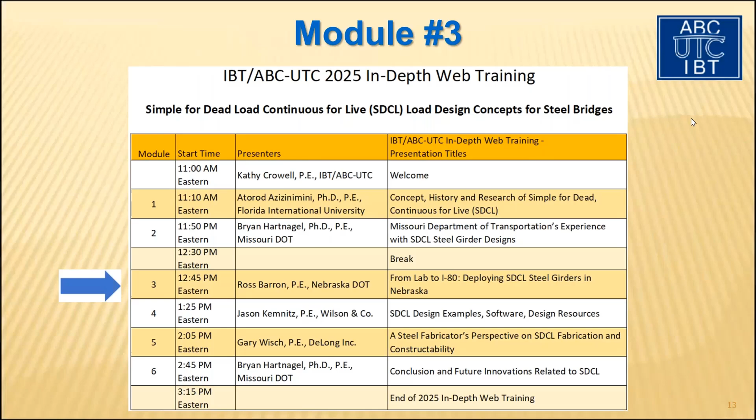Ross Barron is the state bridge engineer for Nebraska DOT, and he'll be talking to us today about from the lab to I-80, deploying simple for dead load, continuous for live load steel girders in Nebraska.

Well, as Kathy mentioned, I'm Ross Barron. I'm the state bridge engineer for the Nebraska Department of Transportation. I've been in this role for about 4 years now. Before that, I was a design consultant here in the region.

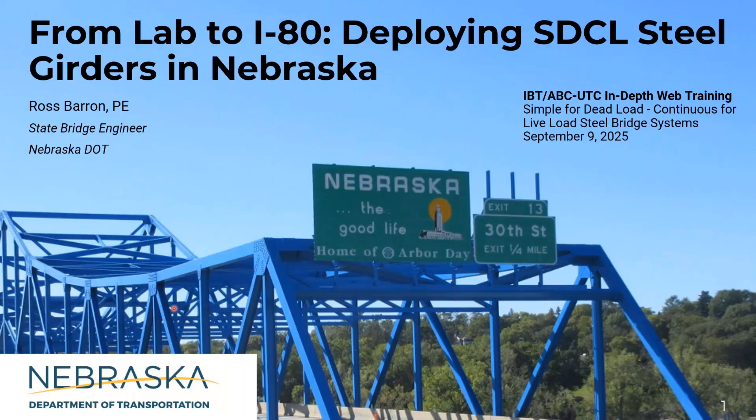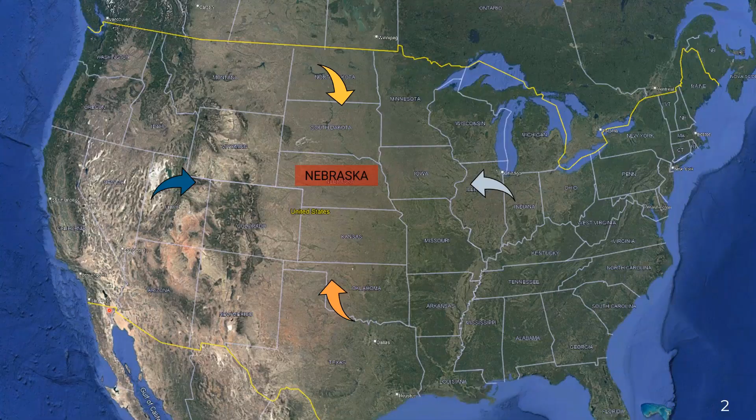Sounds like there's people who may not know, just like Missouri, Nebraska is right in the middle of the country. So I wanted to share where we're at a little bit. Yes, you may fly over it, but I'm going to do a little pitch for the State of Nebraska Tourism Board. Come check it out. There are quite a few open areas to explore, I guess is the best way of saying it.

This is the most recent census data where you can see you've got Lincoln, Nebraska here on the eastern side, and then Omaha is our two major metropolitan areas. But the rest of the state, you can see the western side, it's a whole lot of open area. So Nebraska's got some unique challenges with our state bridges and then certainly with our local bridges.

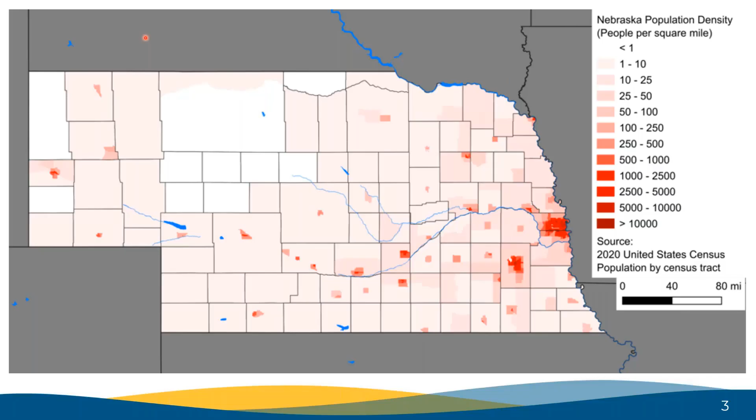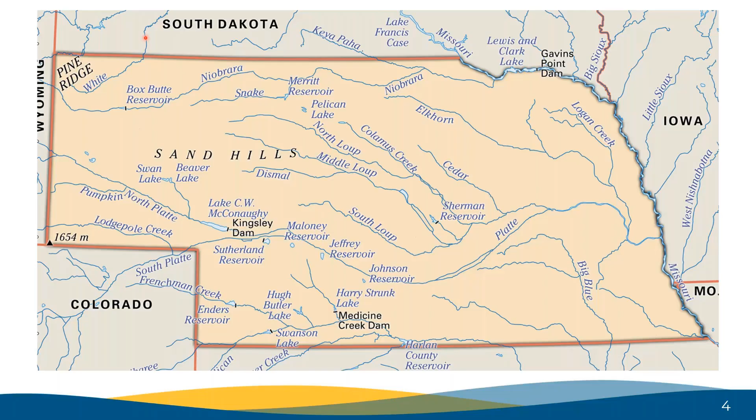So this is a little bit of what bridges are doing out here in Nebraska. You can see we've got quite a bit of waterways that extend all the way to the Missouri, and this is kind of our main challenge as a bridge engineer. We're not going to have a lot of major interchanges, and our urban areas are going to be mostly in that Lincoln and Omaha area. But you can see we've got quite a bit of major channels that we're crossing throughout the state.

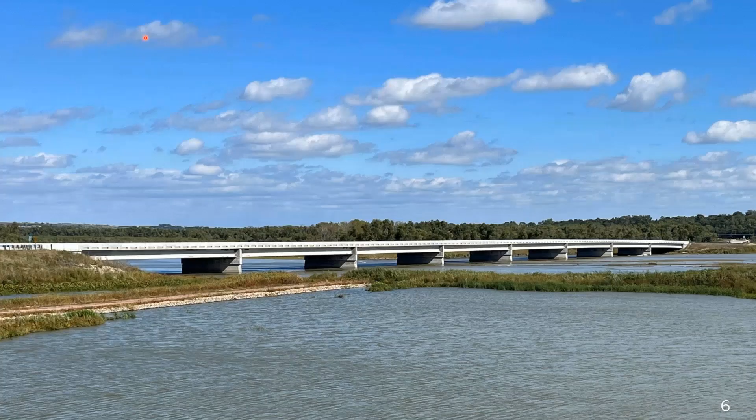But this is what our bridges are going to look like. We have quite a bit of these. We have a lot of braided channels out in this area, right? So wide open, shallow channels. Our highways will extend over them multiple times in a 2-mile period, but you can see this is a pretty conventional bridge for our state highway system.

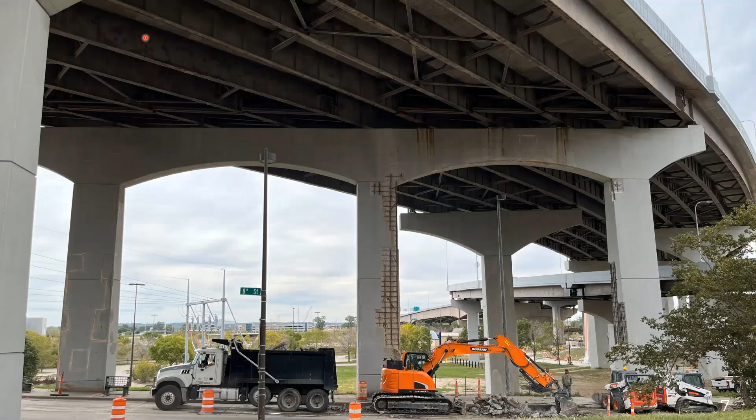But also we do have these urban bridges, right? So we have the challenges that we would face with any aging urban infrastructure. And you can see this is a steel bridge. I'll tell you, we do a lot of concrete bridges that look a lot more like this. And so this is a great time to have a discussion about concrete being economical and the go-to choice within the Midwest, but bringing light to this simple for dead, continuous for live system to really evaluate it and see what opportunities are out there for us.

So the Nebraska Department of Transportation, we directly own, maintain, program, and deal with about 3,541 state-owned bridges. And then obviously with the local bridges, we have 11,729, and the state oversees the inspection program with those, but they are locally owned. And so the local owners will program that work, maintain them, and quote unquote own them.

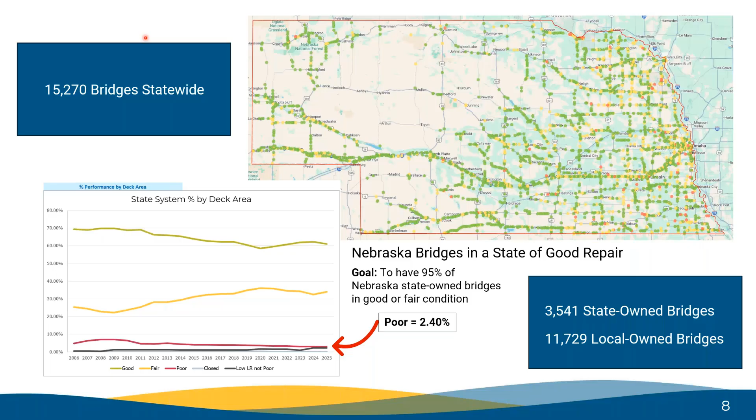So I'm going to take you back. Dr. Azizinamini mentioned the Nebraska Department of Roads at the time, and now it's transportation. We initiated research with the University of Nebraska Lincoln back around the 2001 timeframe. And really the impetus for this was about 1990, and even before then, the industry was really moving heavily into concrete girders.

And so prior to the Simple for Dead Continuous for Live research, NDOT, or NDOR at the time, and the University of Nebraska did quite a bit of research on the NU Girder series. For those of you who haven't heard about the NU Girder, it was a new model following the advent of the AASHTO bulb T girders that produced a wider flange and a more economical shape that allowed us to span differently and be a little more efficient than those AASHTO type pre-stressed concrete girders.

And so we were using these quite frequently. We were still experimenting with post-tensioning. We were evaluating continuity over negative moment regions. And what had become apparent was that the simplicity of the pre-stressed concrete girder was outweighing some of the complications with erection of steel continuous girder systems. And at this time, continuity obviously was very important. It allows you to use a shallower section, and there are big advantages to that.

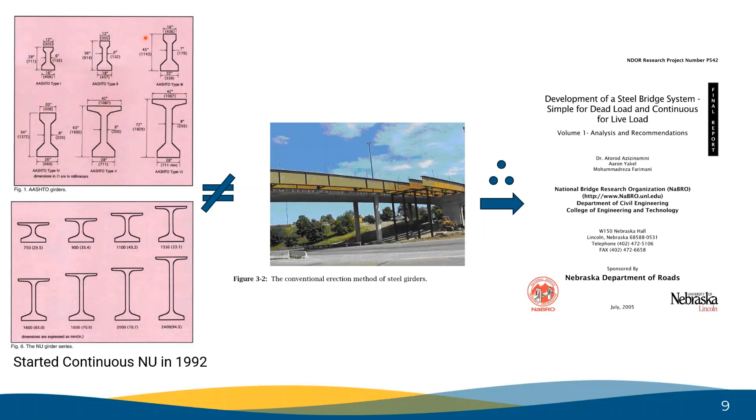And therefore, an expert in research and bridge engineering at the time, Dr. Azizinamini, was at the University of Nebraska, Lincoln. He and his team worked with NDOT to basically evaluate whether we could mimic the pre-stressed concrete girder system with the steel girder. And that's what we're hearing about today. So that's a little bit about the history of how we got here.

And so you can see, and we heard it earlier today, that NDOR at the time, we were there for the tests. Funny enough, I was actually an undergrad at the time, and I remember going into the lab at University of Nebraska and seeing this. So it's kind of a neat opportunity for me today to present about how NDOT is dealing with these bridges 20 plus years later.

So this system, this research, you can see the bridge above. This is what it looked like before. We needed replacement. We had a typical 4-span steel girder system, continuous, and what we were accomplishing was to eliminate those 2 exterior piers and go continuous with a section that is about the same structure depth as it was before. And so that's a huge improvement from going back with another 4-span bridge.

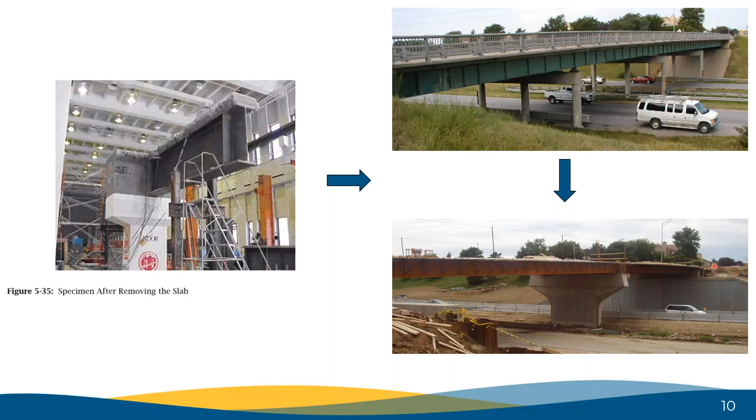And you can notice very slightly, there's a minimal grade raise. That's very important on a bridge like this, that it allowed us to not have to grade out a lot of the area and affect, you can see the apartment complex in the background, those area buildings. So NDOT was there at the beginning, and we implemented 3 of these systems. You've heard about them a little bit this morning. I wanted to show you where they're at.

So the first was an urban bridge in the Omaha area, and it crosses Interstate 680 in Omaha. It's a north-south route, and we'll talk about that. And then the other 2 were along I-80. For those who don't know, I-80 is our main interstate in Nebraska. It stretches all the way from the east side of the state, travels across, follows the Platte River, and goes all the way across. So that is a key interstate connection for Nebraska Department of Transportation.

So the fact we built 3 of these over an interstate can tell you that really the focus of that research was to not necessarily take the MoDOT approach of using these on smaller spans, but the intent here was to showcase that this system can be placed over an interstate where disruption to traffic is very impactful. And so we really wanted to provide that proof of concept, and you can see the results.

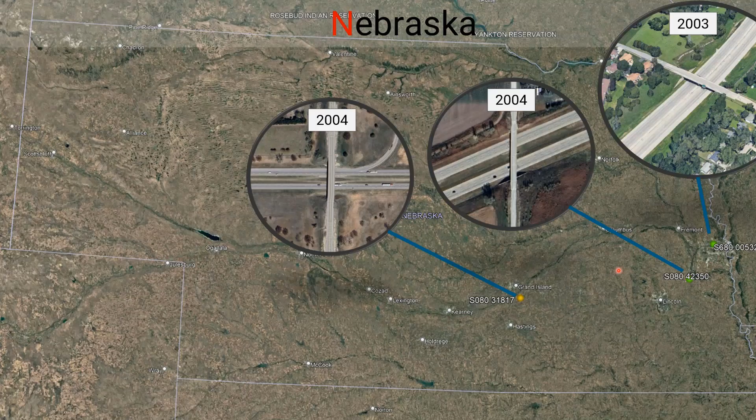So I want to talk about the bridge over I-680 first. This is Sprague Street in Omaha, Nebraska. This was built in 2003. Right away you can see this is an 8-lane interstate with sizable shoulders, and we have a 2-span bridge. You can see we've got an MSE wall or a precast wall system on either side to bring in those abutments. And sliding to the next page, you'll see the configuration a little bit.

So we've fixed the superstructure at the pier, the bearing condition, and then we've leveraged integral abutments and expansion bearings at each end. You can see it's a 2-lane bridge with sidewalks, so it's a pretty typical urban bridge. It's connecting 2 neighborhoods, but again, the key constraint, as any state bridge engineer will tell you, is please don't close that interstate. And so when we talk about, you know, if there's a need for splice locations or erection timing, you get one overnight closure.

And because of that, a pre-stressed concrete girder or a precast system, it just comes out as having a lot of advantages. So this bridge, like I mentioned, was built back in 2003. So that makes this bridge, I think I put 21, but for those who are better at math than I am, apparently, I put 21 years down. So it's a 2-span. Each span is nearly 100 feet, so 194 foot total.

So today I wanted to share just high level the NBI condition ratings, right? So this is how the Fed highway system works, where we will rate our deck, superstructure, and substructure anywhere between 1 to 9, 9 indicating the best condition, and 1 being that bridge is closed and it's about to fall down. So we don't let our bridges ever get to 1.

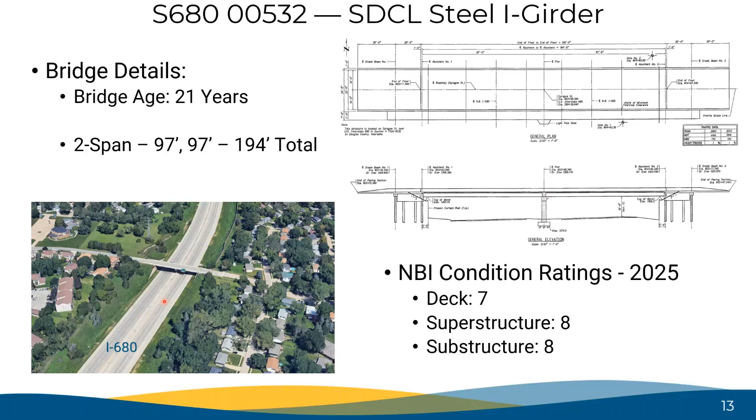So now to the details. We've seen some of them a little bit, and I just wanted to share a little bit of my perspective, that you can see what's happening during construction here, where on the left, we've got a picture of both girder systems in place. They're setting the formwork. We do use steel stay-in-place forms here, but it's a very, very easy, simple approach with traffic going underneath. So you can see it's minimal disruption. Now at this time, it looks like it's head-to-head traffic and there's nothing going on here. But you can see this really showcases how shallow that system is.

And then we've seen this detail before. It's worth noting that we still have these wires hanging down, that these sensors were invaluable for the research. But it's really cool to see this detail, and I appreciate the simplicity of it overall and the ease of construction. I think one thing we heard from this contractor and every other contractor is, oh, we thought this was a research project and it was going to be really challenging, when in reality, this was very, very easy and straightforward, very economical, and really, really simple to fabricate the end of that girder.

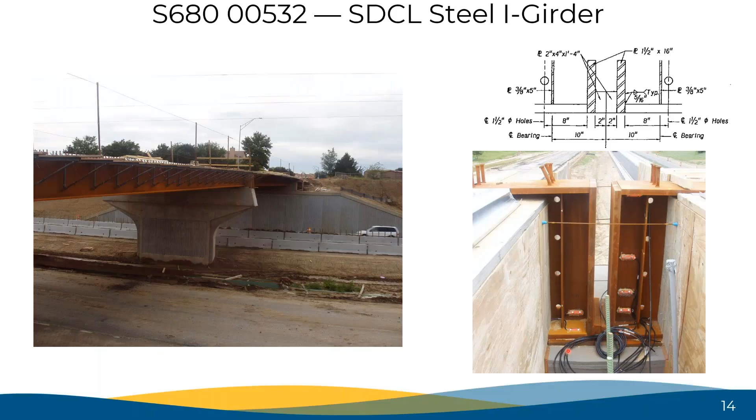So the one thing that concerns us in Nebraska, maybe more than anything, is we know our substructure and our superstructure, our girders, are going to be okay for a long haul. But our deck, we are a state that salts our decks, right? We have very, very harsh winters where we have freeze-thaw cycles that happen within the same day, where we'll get a lot of snow and it'll melt the next day. So we have rapid temperature swings. What that means is we'll go out and we will pound this concrete with salt throughout a 6-month period potentially, to ensure that they're safe to drivers.

So the deck condition after 20 plus years, there's no overlay on this bridge. This is the original cast in place concrete deck. We see no signs at the pier of any major cracking. There is narrow random cracking, but we were successfully able to seal those. And so you can see the deck condition, we've got a little bit of rusting, but that's indication of nothing more than the drainage going that way. And it's likely fertilizer more than anything. You can see some white spots, but we think that's paint. So again, the deck condition on this has performed very, very well over this 20 plus year period, and we're very happy with that. That would be one of the concerns, that we would cause adverse cracking to the deck.

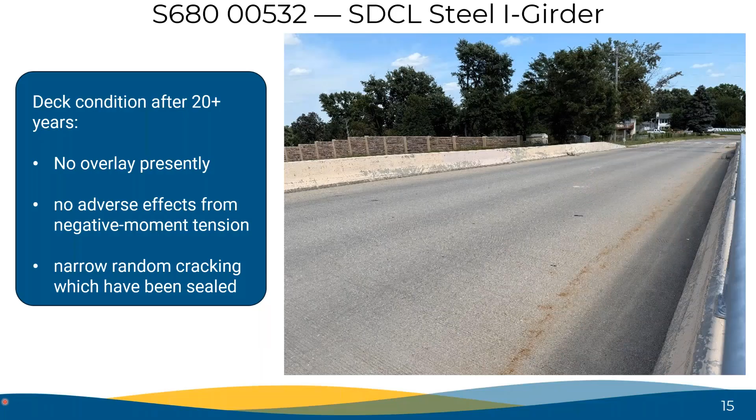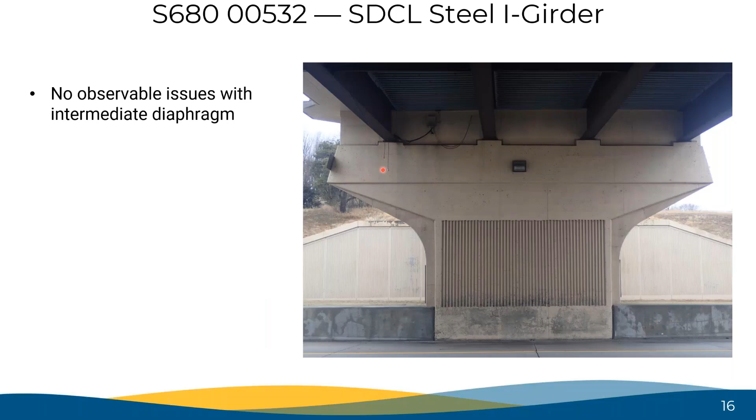So the intermediate diaphragms, another area where we were thinking, oh, what's going to happen here? Research showed it would be fine, and sure enough, there are no issues whatsoever with this diaphragm. So you can see there's minimal cross frames near the support. These are our sensors dangling down. I don't think we've gone out and tested them anytime recently. So you can see it's very clean, and it's working very, very well.

So the one thing we have seen is at the abutments, we've seen some salt collection happening at the ends. If you look very, very closely, some scaling along the steel at the ends, mainly along the fascia girders. And then you've got some rusting of your stay-in-place form deck pan. Really, all that is indication of is, again, you can see the amount of traffic that can travel down here. So you're going to get a lot of salt spray coming up and hitting these girders, particularly the fascia girders. And so we're just seeing an indication of that.

And this is weathering steel, so you are going to get kind of some advanced corrosion from that salt exposure. For those with a keen eye, you can see there's a concrete pad here. Basically, that was just an erection pad to help support the girders during construction, and then to fill in that gap with the MSE face.

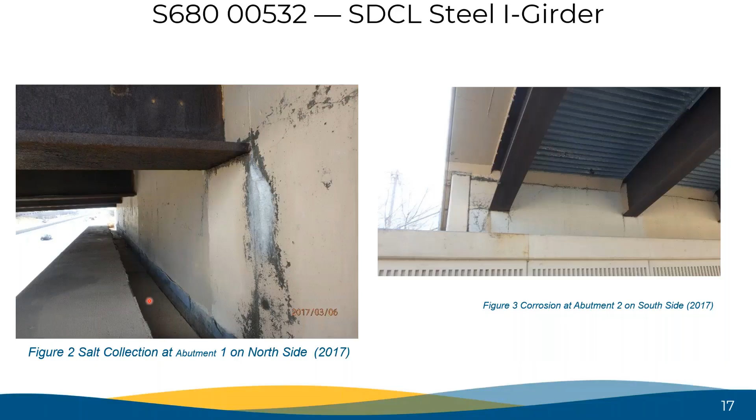We think because this is an integral abutment, you're going to certainly get some thermal shifting back and forth. And so we think over time that's just settled down. We've had a watch on that for a while, and there's not really any concerns, but we're keeping an eye on that.

So kind of the recommendations coming out of this, a review 20 years later on what do we think about this system. This bridge indicates that there should be no concern with continuing to use this method at this span length with this configuration of the integral abutments. The structural depth limits were met, that a pre-stressed concrete girder would be about the same height. The erection was very, very simple.

Ongoing maintenance recommendations are very, very minimal. We do intend to zone coat those fascia girders at the end to protect from that salt spray, because this drip bead detail wasn't working perfectly, we think we had water running along that flange. And then, as with any bridge about this age, you want to check for settlement of the approach slabs, the joints. Certainly we need to continue to maintain, but these are all things that we would normally be doing.

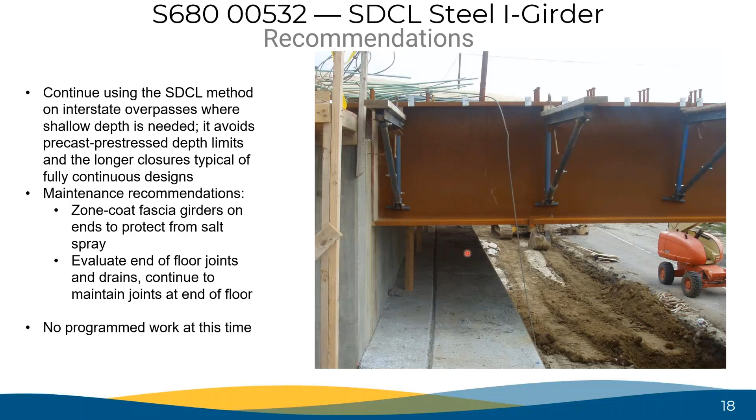And so it's worth noting, we have no programmed work at this time. Typically we'd be looking at a redeck around this time or an overlay, but we haven't programmed anything at this time. So overall, this bridge is not a concern. It's working wonderfully for us.

So now I want to move more towards I-80. You can see the span length on this bridge. This is out near Grand Island, Nebraska, at an interchange out there. And this is a tub girder that we saw earlier from Dr. Azizinamini. And real quick, it's worth noting, this alien looking thing, that's just sensor wires. So don't be concerned about that.

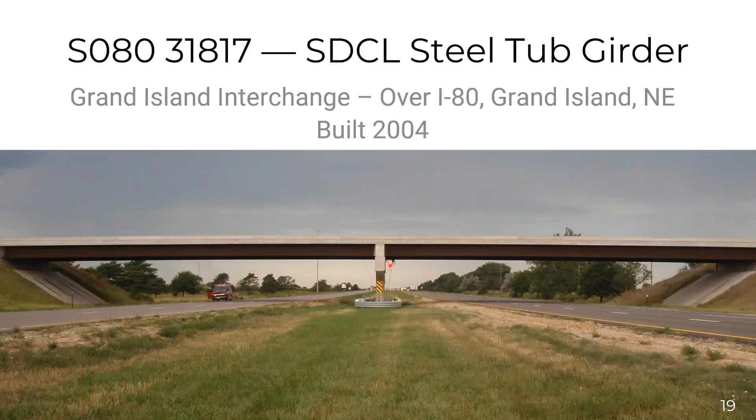Okay, so this bridge, again, probably fuzzy math, it's not 21. I think by the time it opened, it's probably about 21 years old. So it's two span, 139 feet, 139 feet balanced. You can see it's a similar configuration where we've fixed the pier support, and then we have expansion and similar integral abutments at each end.

So Interstate 80 in this area, it's a 4-lane divided interstate. You can see here there is an on-ramp coming on, so it's got that additional lane. Instead of using MSE walls on this bridge, we use just typical concrete slope protection. And it's worth noting we do have pipe piling on this one instead of an H-pile with those integral abutments.

So you can see it's a fairly shallow structure depth. That's a nice, elegant shape. And I'll tell you, that's something that any bridge engineer is going to want to see, these long, shallow shapes that follow that crest over the interstate. So it's a really elegant looking bridge.

So construction in 2003, if you were on earlier, you would have seen some of these pictures. The construction is very, very simple of these. This is like setting any beam, except one thing to note, these tub systems are very, very stable, meaning you've got cross frames on the interior. They're stable once you place them.

You got a 2-crane pick here, but you can see that the truck just drives right down that road. They pick it up, lift it, and put it into place. They've set some down here, and it goes very, very quickly from what I've heard. So again, the contractors really, really like this system.

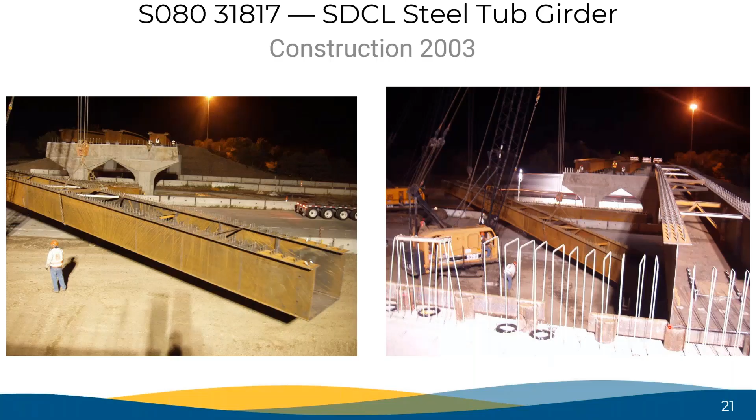You saw it with Brian's presentation earlier, and you'll see it here where we've used a simple integral detail where you just take the piling up to the bearing seat and you weld a channel across and you just plop those things right down on the abutment. So it couldn't be any easier for a contractor to build.

You can see again, what this speaks to is the stability of the system. One thing I'll note, there are no external cross frames between these beams. And so when you think of erection time and the time that you're closing to traffic, I bet in this picture, even though we don't see any cars, that this was open to traffic while this picture was taken.

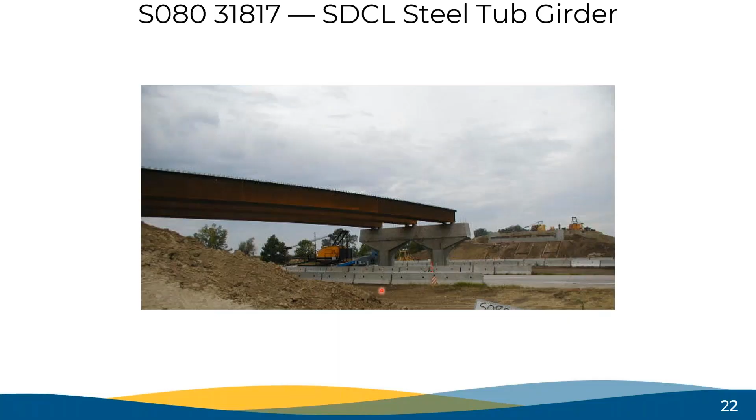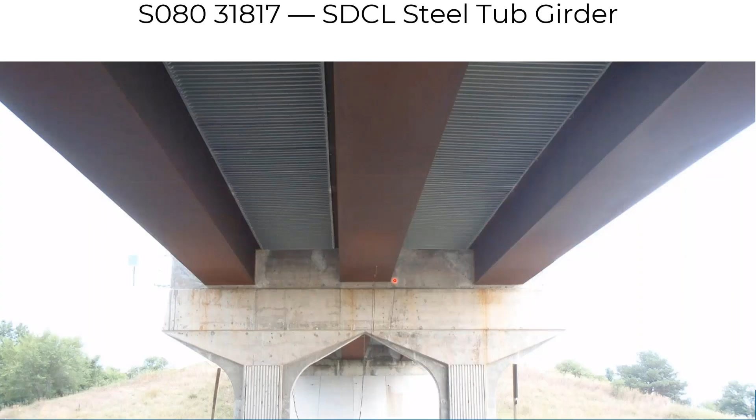But overall, it's looking great. So, a quick detail towards the end so you can take a look at this. Just like the I-girder, you're going to have this fabricated bar on the compression flange. And then here we had turn down plates at the tension face as well at the pier, just at the pier. And then a really, really nice detail to simplify construction that was easy to install is this bulkhead, so that you can just pour concrete right up to it. Since you're pouring your diaphragm and threading bars through these holes, this bulkhead made it very, very easy.

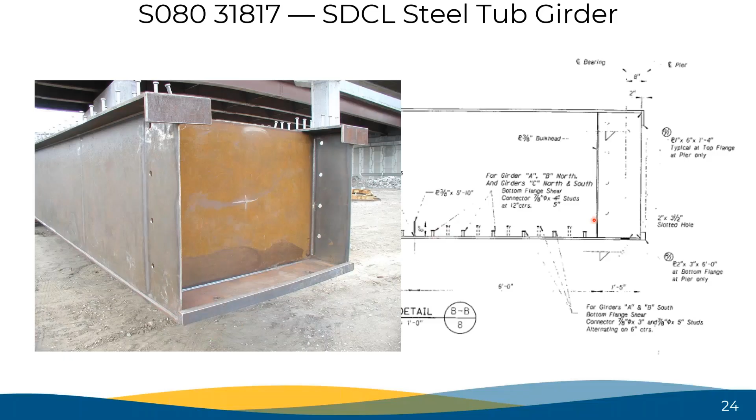And then if you'll notice, you've got shear studs on the interior here, and that's for that compression flange bracing where we're going to pour some concrete kind of through here to brace that bottom flange. So it forms up pretty easy. I thought a really nice detail here as well, and the turn down was certainly, it looks like a normal turn down. We're threading the bars through, but it was these bearing blocks that, from a bearing perspective, this is very easy. As I mentioned earlier, this is a fixed pier, so everything gets encased. So really this is just temporary for construction. But again, you can see how easy this is to form up, and how easy it is from a detailing perspective with the reinforcing.

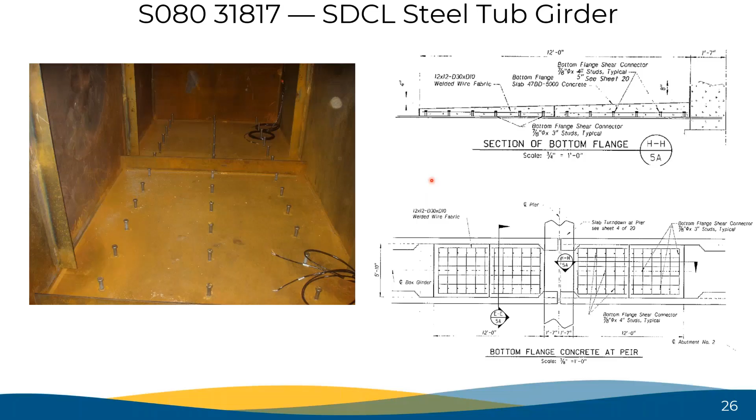It is worth noting we did use 5 KSI concrete in that diaphragm due to some of those additional forces that were in there. So here's a picture from the interior of the tub, and this is showing those studs and showing that compression concrete that we would be placing after this. A really nice detail. It's been performing well. Unfortunately, I don't have pictures of what it looks like today, but inspectors have noted that it's in great condition and they're seeing no distress at all. So this detail has been working very, very well for us.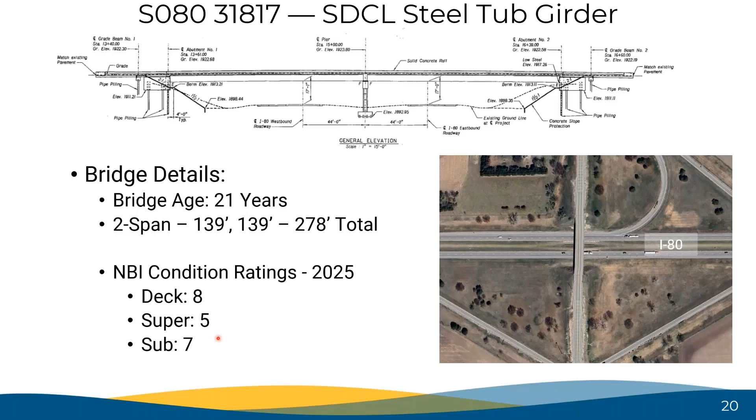One issue we have seen is that the deck is an 8, the super is a 5 in the most recent inspection, and then the sub's doing just fine. So that super rated a 5 means it's in fair condition, that there's some issues with it that we want to keep an eye on. And so if I go back to where I was, you can see we're seeing some scaling issues at the end of this 100 KSI steel tub. And we think it's an indication of the similar salt spray we saw on that I-80 overpass, where salt is gathering around that bottom flange and it's just scaling it.

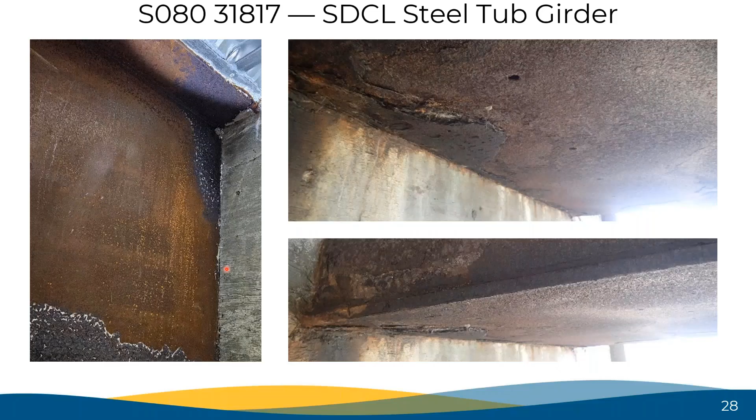So this is actually the exterior, but you can see you've got salt spray here. We've done some additional studies. We've climbed up in there and we've been monitoring some deterioration on the inside of the tubs. And we think there might be an airflow issue where some water is getting in through the back wall of this bridge. So we're tracking that, and we think we've got a good fix. And so one of the things we do want to do with this superstructure, and that we would recommend looking at in the future, is improving airflow within those tubs. If we're using the same dimensions for the back wall detail, maybe we'd want to widen that integral abutment a little bit just to provide a little more concrete protection to it.

And then we do want to enhance some of the abutment drainage details to make sure water isn't getting into those back walls. Because we've embedded this steel in the concrete, we want to make sure that water is pushed away from it. And then if we were to build this bridge today, we likely would have end zone coated those steel tubs just to prevent any of that deterioration that you're kind of seeing here. And then it also helps with just the rust staining effect. And so it just helps kind of pull that water and wick it away.

So ongoing maintenance on this bridge, it's fairly minimal. We are monitoring some of the issues with the abutment, and we do intend to come in and redo that drainage. We're looking at whether we want to fix any of this concrete by tearing it out or simply just doing some crack injection and continuing to monitor.

But we will be replacing the approach slab, and then we will be kind of doing some treatment to that steel at the end. So still overall, the bridge is performing very, very well. The issues with the steel shouldn't detract from the applicability of the system and the elegance of the configuration.

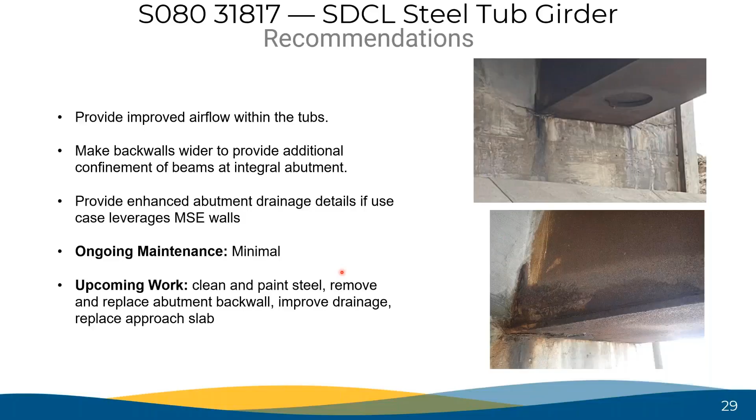Okay, so now to another I-80 bridge. This was an ABC application that we saw earlier. This is between Lincoln and Omaha over I-80. You can see that it's a 4-lane divided interstate today. Similarly, shallow structure depth, very elegant long spans. We still have fixity at the piers and we still have expansion at the abutments.

We did on this use an MSE wall to bring in those spans. So they're about 137 feet each to about a 274 foot long total bridge length. And then this is on a skew. So this is a 24-degree left-hand back skew, and you can see it here. Left-hand back, meaning that the left-hand side is skewed backwards.

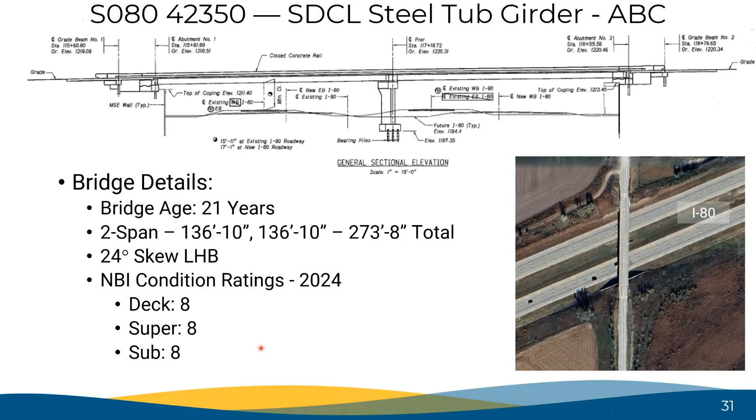And you can see from the condition ratings taken last year, this bridge is in excellent health for a 21-year-old bridge. So we are very, very happy with what we're seeing out of the inspection reports on this ABC application of this SDCL bridge. This is also a tub girder, and this is the one that had a deck cast prior to placing the girders.

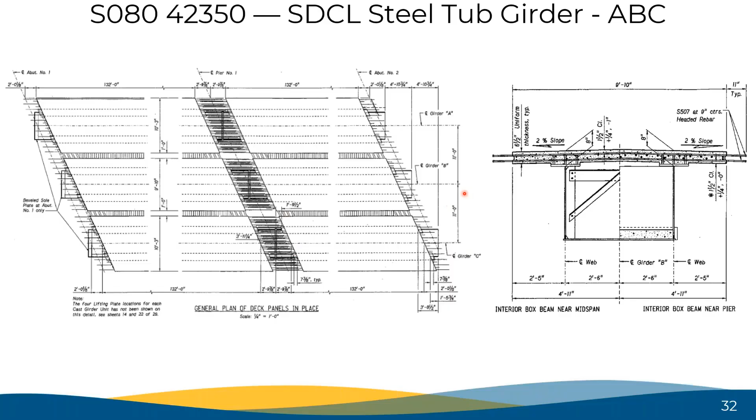So this is the layout of the deck panels. This is the center line of girder, if you can see my mouse here. And this is how all the panels fit up. This isn't an easy thing to do with a skewed bridge, but the intent here is this is I-80 traffic between Lincoln and Omaha, which is a very, very vital connection for the state. And limiting the amount of closure time on I-80 should be desirable for any bridge we construct. So this was a good test case to evaluate how we could accelerate construction even further by pre-placing that deck.

What was nice about that is that we saw it earlier with Dr. Azizinamini's presentation, that they had these girders on site, the steel tubs on site, and they were casting the concrete right there. And so there was plenty of area and it was really easy to do. The contractors had no trouble based on what we heard. Very, very simple, and we got an excellent product out of it. So no issues with placing that concrete there.

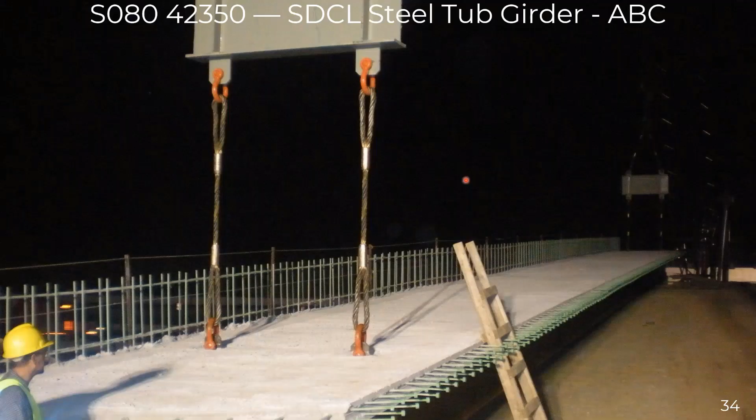The lift was a little harder, right? I mean, you've got all that deck concrete on there now. So it was still a 2-crane pick. A little heavier cranes. The contractor didn't have any problems, particularly given that we had plenty of space to work with out there. So this is kind of the pick lift, the lifting of the girder. You can see the first one's down, the other span's placed.

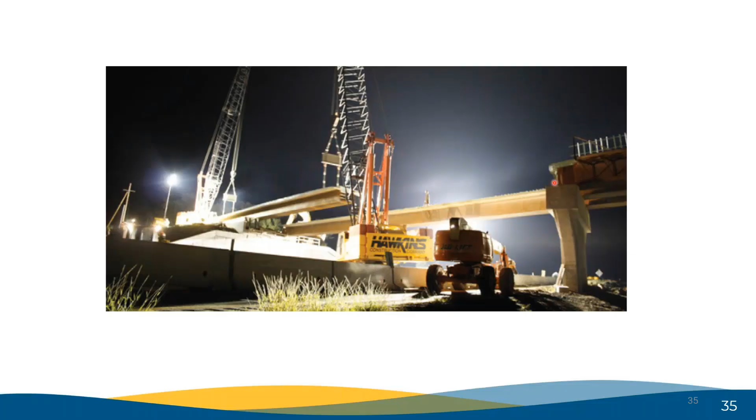Pretty easy nighttime closure. They've come out and they've just put some dirt out. They marched the crane out there. They've got the girders up on the bank already with the deck on them. And they just swing these things out. You can see this one's just going to extend it out, and this one will swing over and just set them into place. Following that, you've basically just got your closure pours and you're good to go.

So one thing to note with this system, again, with the erection being very, very elegant and easy, you can see how clean this is. There's no external cross frames whatsoever. Because we don't have stay-in-place forms, you can see the bottom of the deck. These 2 lines here indicate the closure pour that they had to do between the pre-placed concrete deck on the tubs. But you can see this is a picture taken last year that the deck condition looks excellent for a bridge this age. And so speaking of cross frames, this is very minimal cross frames in here as well.

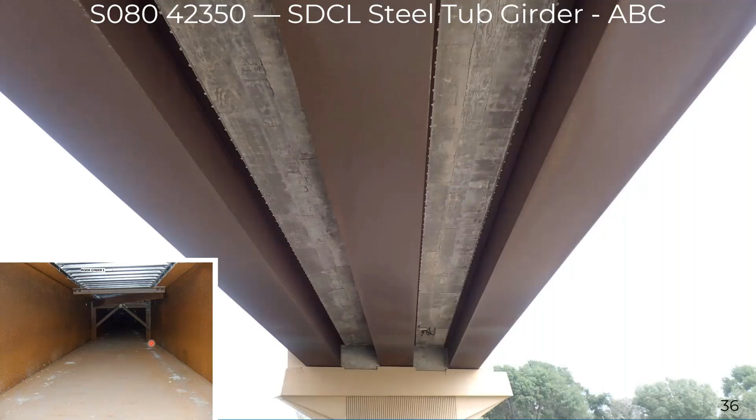And one thing to note, when I was going back and doing some research on this, the vertical webs of the tub really simplified fabrication. It's something that we're studying a little bit more, that too often you'd kind of see a trapezoidal section where you've got an incline to those web plates. But the fabrication process with the vertical plates went very, very well. It was very easy. There was good feedback from the fabricator that we saved a lot of money by having these be square tubs. And you can see here the intermediate diaphragm.

Unlike the other one, there are zero issues with this concrete. Similarly at the abutments, even with the skew, you might expect to see some cracking maybe out here or maybe in here, but this is actually a semi-integral system now that I see it. It's performing very, very well with no cracking or anything like that.

You can see these are the access holes we use to get into the tubs. It's very important when you have tubs that you still have inspection access to get inside and evaluate the interior. You'll notice the ends of these tubs don't have the scaling we saw on the other one.

You can see on these fascia girders a little bit of a profile of salt spray coming up, and you can see some discoloration throughout as you look longitudinally. If you look hard at your screen, you can see a slightly different orange. And so we do expect that scaling will occur at some point along these girders, that we'll need to do some end zone coat painting, but overall no concerns at this time.

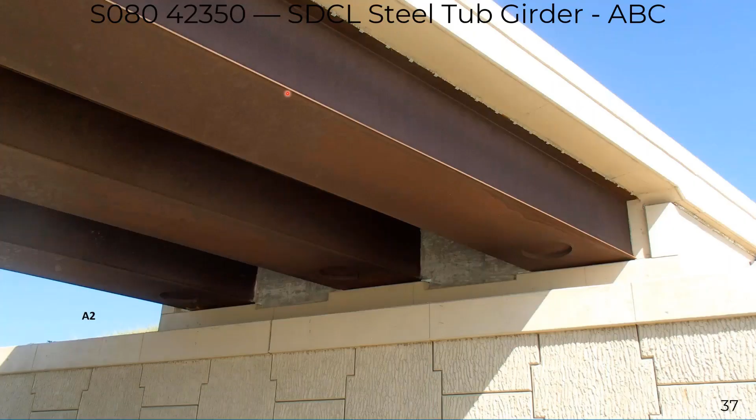So some recommendations coming out of this. The biggest one here is if you can eliminate lateral bracing on a steel girder bridge, try and do that, because from a rapid erection perspective, it provides a great product that allows you to really open that to traffic quickly, so not really interfere with traffic operations. The skewed configuration showed no signs of distress. We would have no concern with going with this same system with a skewed configuration.

And then pre-placing the deck, this deck does have an overlay on it. As we saw earlier, it's a 2-inch silica fume overlay, but it's performing very well. This has provided a very durable deck for a low ADT road. Now this sees a little less salt than you might see on the interstate, but it's a great application, and you can see from this picture that we have limited water leaking through that deck.

And then the limited internal cross-frame bracing is very effective. It allows us to climb in there and inspect, which is very important, and it keeps the weight down. Maintaining the vertical webs I mentioned was a good design decision, and then that 2-inch concrete overlay is doing very well. So for this bridge, we have minimal upcoming work.

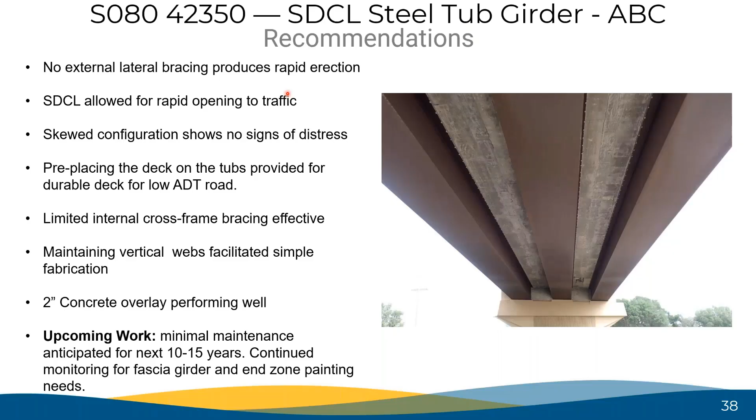We've got minimal maintenance, the typical stuff you might see on a bridge, like cleaning and replacing joints and washing decks and clearing out drains. And then we're just going to continue to monitor those fascia girders, and eventually we'll probably need to end zone coat those. Okay, so NDOT perspective 20+ years later, this SDCL system, it's such a simple design.

I've spent a lot of time as a design engineer, and I think there's a lot of applications for this that make it just as simple as a pre-stressed concrete girder would be. I think it's clear from the contractor's perspective, the construction is very simple. You're just putting the beam down and you're pouring some concrete around it. What we've been seeing from these bridges is that we have a durable design, that we don't need to worry about the details work. They're straightforward, and further, it offers the opportunity for accelerated construction.

There will be times where a steel profile is needed just from a structure depth perspective, and being able to place these girders without splice locations will help us out quite a bit. One thing I did want to share though is, why does NDOT not have more examples? This was a question I asked myself while preparing for this presentation, and I don't have a good answer.

For all of you listening today, whether you're working for a public agency, a DOT, or whether you're a consultant, I want to bring awareness to the fact that this system was researched 20+ years ago, and yet we're not seeing wide adoption of it. I think bringing attention to this will hopefully make us aware that this system is a very viable alternative to a pre-stressed concrete girder, particularly when constrained by things like vertical profile.

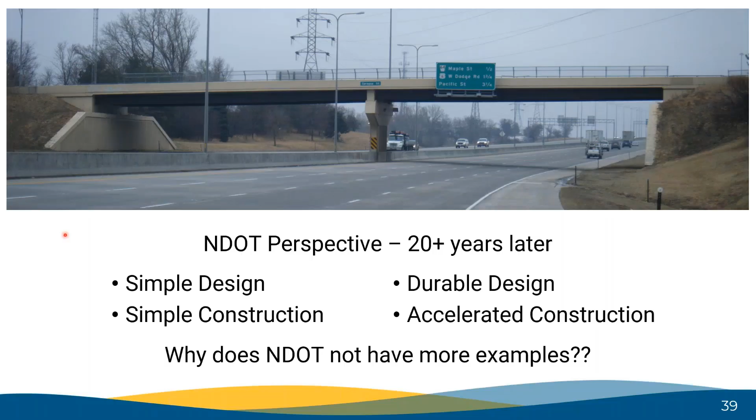So I wish I had more examples, but I think the key lesson here for us is, let's make sure we continue to explore these innovations, that we continue to build, that we leverage the good research that's been done, and that's NDOT's intent following this, that you will see us doing more alternatives that include this SDCL design.

So with that, if you see orange cones and slow signs, please slow down. There are workers working. And also, just a reminder for everyone, buckle your seatbelts, please, and put your darn phone down when driving.